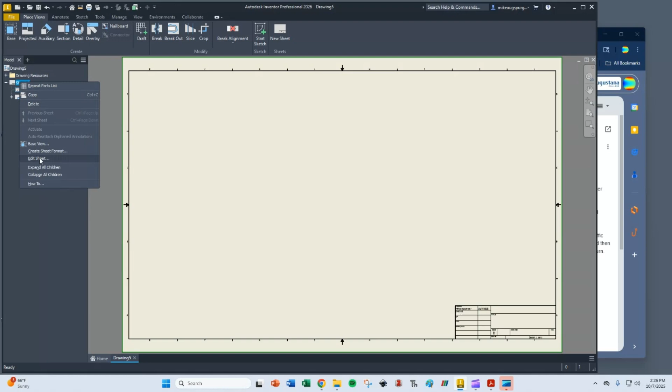Go to New, choose ANSI drawing, and do some of the basic stuff here. I don't want this giant sheet, even though an assembly might require a larger sheet, but I'm going to stick with the B size. And I'm going to change my properties. So I have a title, pulley assembly, and I'm going to fix my name and apply, and that looks good.

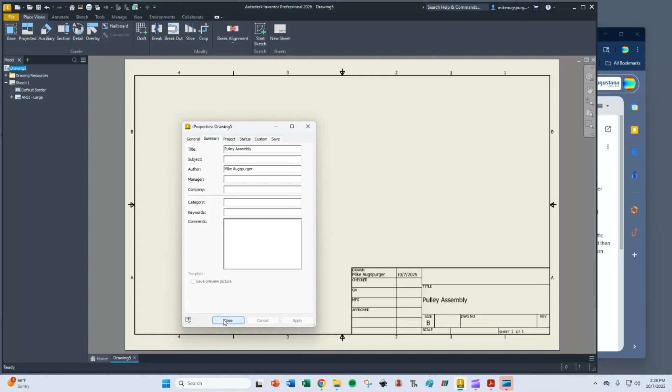We're going to go through the same process to start that we did before. We want a base, and so we want the assembly to be our base, so pulley assembly.

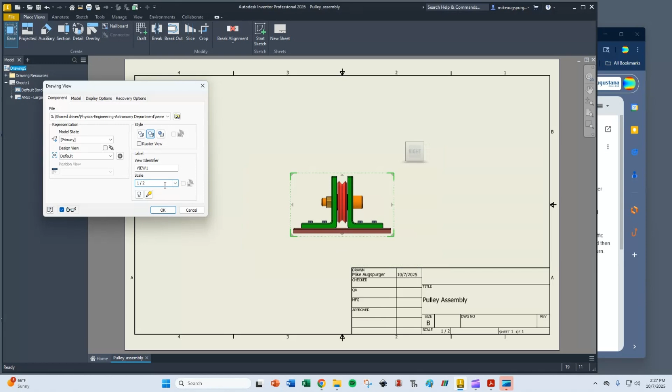You can see I've got to choose a view for my base. I'm going to go with that view, I think that gives me the best picture of what this is. And I have to choose a scale. The 1:1 seems too big, but the 1:2, or half, seems too small. I'm going to go with 1 to 1.5, just to give me a flexible sized view.

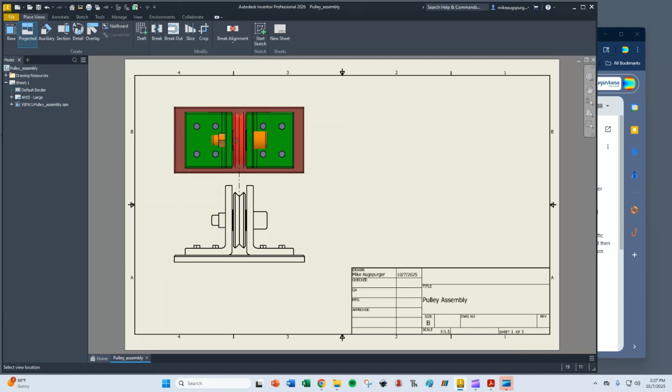And then I'm going to project that view. I really only need one projected view, I think. And I need that view, and so I'm going to create there. And that's a starting point anyway.

Now I want to show you some tricks. The thing about an assembly drawing is we know the dimensions already, so we don't really need the dimensions. What we want to do is show how the part works. And so sometimes there are ways you want to show that give you some details that these don't.

So one of them is called a section view. So we're going to make a section view here. I'm going to go to the section, and you see how the little yellow dot comes up? It's suggesting different sectionings, and I can do any, but I want a section right through the middle. I want to show that key apparatus with the pulley. So I'm going to go right through the middle, and then right click and click continue.

And you can see it draws that picture halfway, as if it were cut in half. I could put it up here, but that looks kind of ridiculous. So I'm going to go with this view and move it later.

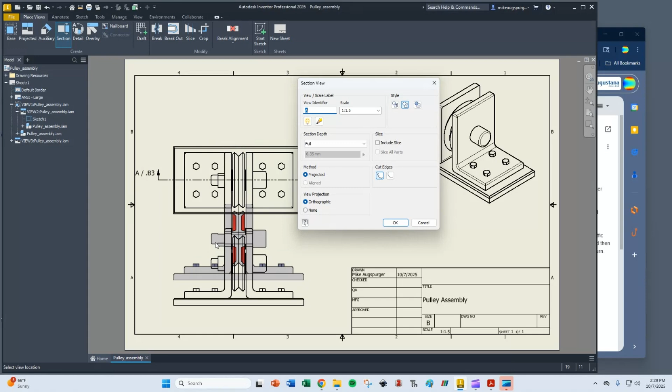So I'm going to click that view, and I'm going to escape out of this so I can move some stuff around, and see if I can grab this and move it up there. And this guy here is telling where to look for that section view.

And there's a lot of stuff. The view sheet and view sheet index, those are things I don't really need because my sheet is pretty small. So the only thing I need is a view identifier. I'm going to get rid of some of that complicated stuff. And you can see then this is section AA, so it goes from point A to point A.

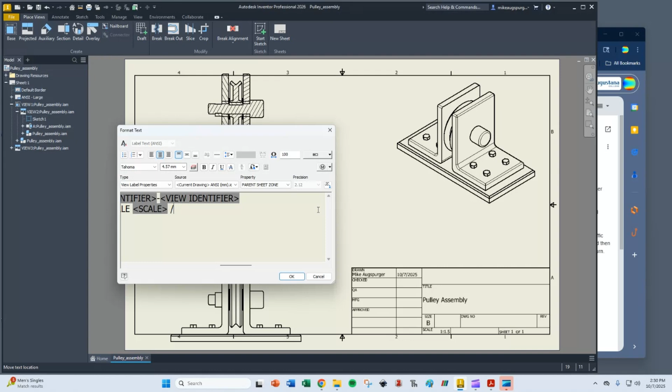Similarly, I don't need the parent zone. So those zones are parts of the sheet. You can see when you look at a sheet, it's got 4, 3, 2, 1, B, and A. So this would be B4 and B3. Sometimes it's useful if you've got a really big sheet to be able to point out different parts of it, but I think we're okay without that in this case.

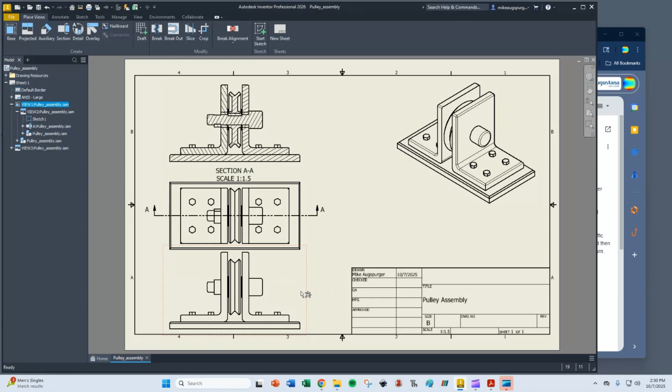And because the other ones are, if I look in here, you'll see this box is checked. That says it's going to follow the style from the base. That includes the scale—oh, I'm sorry, this is the one that followed the scale from the base. And so that's going to follow that.

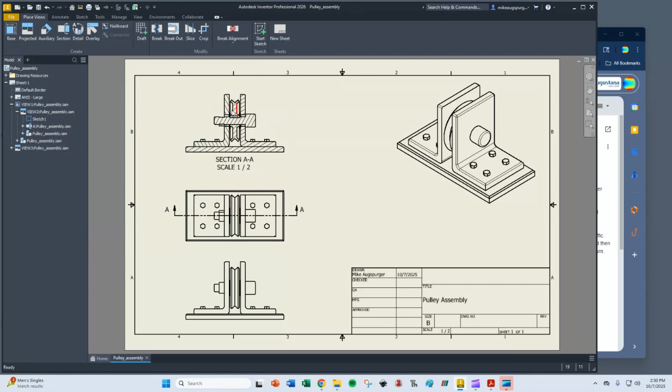Actually, one of the things I want to do is I want this guy to be in a little more color. So I'm going to go in here and go into the edit view here, and I'm going to click shaded there so we get a shaded picture of that.

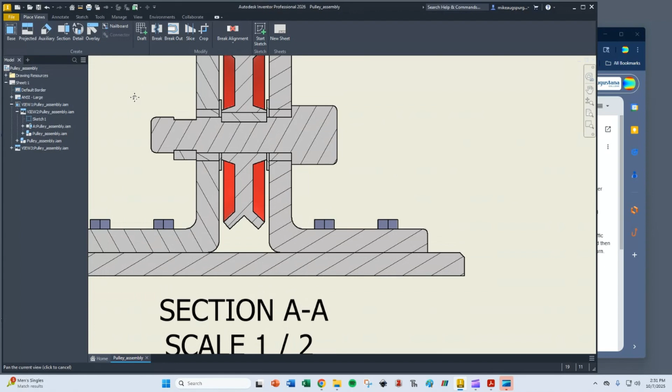And I want to also go in, there's a lot of detail here that I want to show. So I've got some parts here, the collar, the bushings, the key, and the washers that I want to point out. So the first thing I'm going to do is change the hatching, because they're small parts, so that hatching doesn't really work since it's very far apart. So I'm going to change the scale of the hatching.

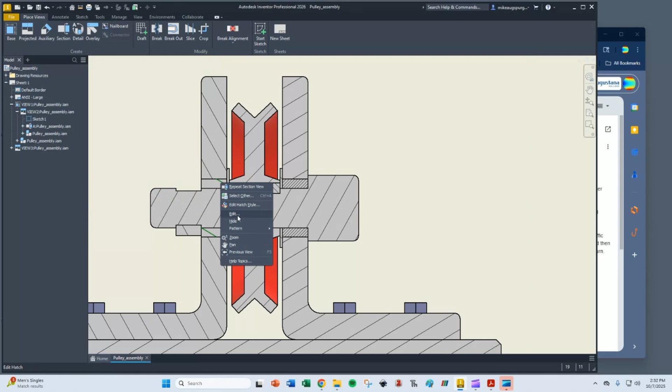So we're going to go to 0.25 for the scale of the hatching, so there my key is a little more visible. With this one, I'm going to go even smaller, 0.125, and you can see that's at an angle of 45. I'm going to make the other bushing match that, so I'm going to change this angle to 45 and the scale to 125. And so now you see that my hatching matches there and there.

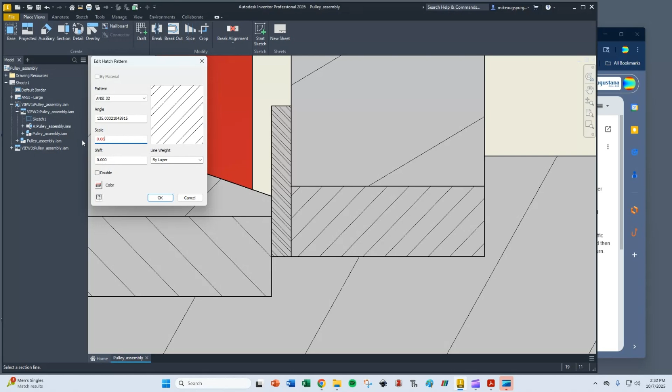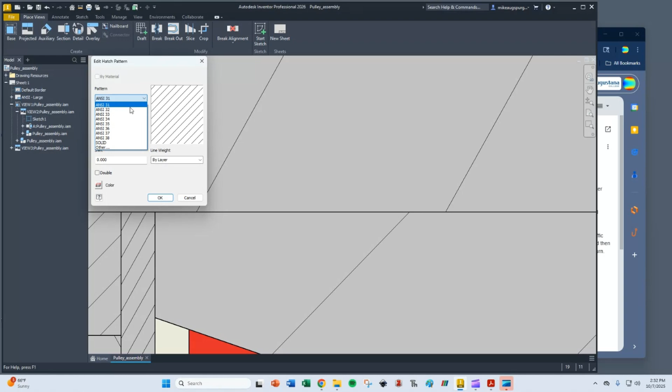I'm going to do the same thing. You can choose different styles too, like that style. I'm going to go really small here because it's such a small part that it's hard to see the hatching, so I'll do that with both washers. If I edit hatch style, that's actually going to edit all of the hatches on the whole part. I don't really want that. What did I change this to? ANSI 32. So there we go.

Now you can see, I can see my parts a little bit better. But maybe that's still not good enough to really show the detail. So what I want to do is have a detail view.

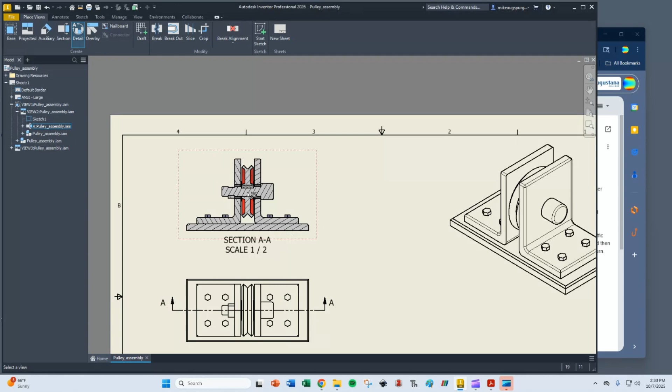I'm going to go to a detail view, and I want this center part. So I'm going to click with left, and you see I click again with the left and I get that sort of expanding view. I want to capture some of that there, and that enlarges that for me. Again, I don't need that sheet zone in there, so I'm going to take that out. And then that just tells me it's detail B. Get rid of my parent zone here.

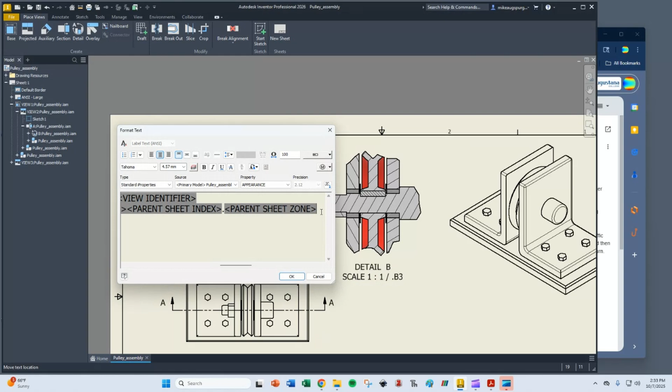And so this tells me to look over here for the detail. Now I want to tell people what those different parts are, so there are a couple of things I can do to do that. One, I'm going to add a parts list.

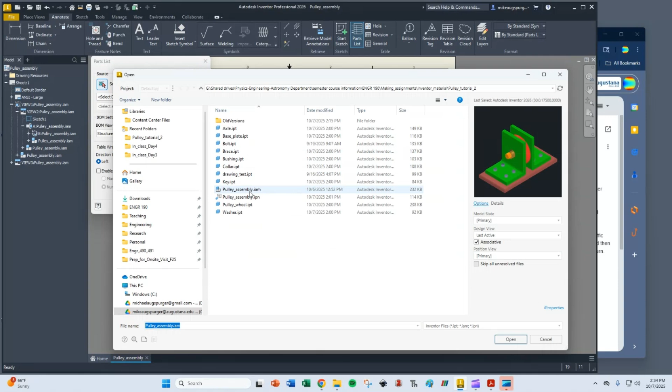So I'm going to go to annotate, and I'm going to add a parts list, and I'm going to select this document again, the assembly. Standard, everything looks okay there. A BOM is a bill of materials, I'm just going to click yes there. I'm just going to grab that and put it there. That's a little big for me, so I'm going to shrink it down some. But I get my parts list.

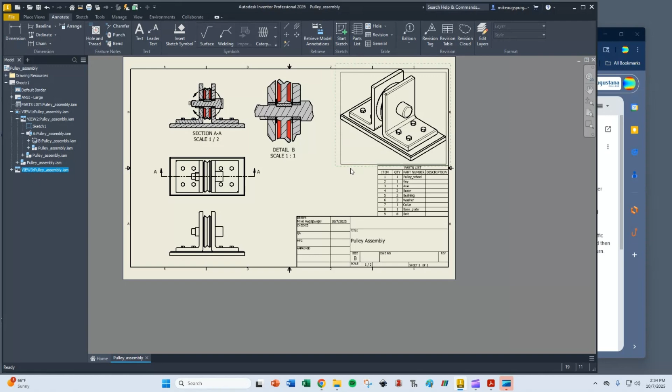Getting a little tight in here. Now I'm going to annotate this, so I'm going to have a text leader, and I'm going to point that. I'll left click it. And what was I pointing at? The bushing, so I'm going to put bushing there. And then I want to point to the other bushing as well, so I'm going to escape out, and I'm going to right-click that line and choose Add a Vertex. What that allows me to do is add a second leader to that one label.

Okay, so now I want this guy, that's my key. And I want my washers. So left click, washer, and then I'm going to escape out, add a leader, and connect it there. And so there I got my washer and my bushing, and let's add my collar too.

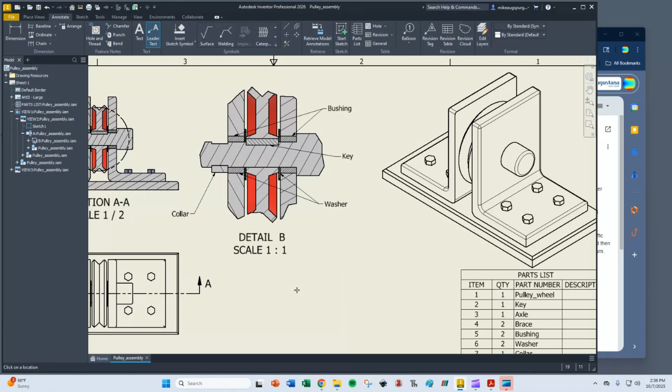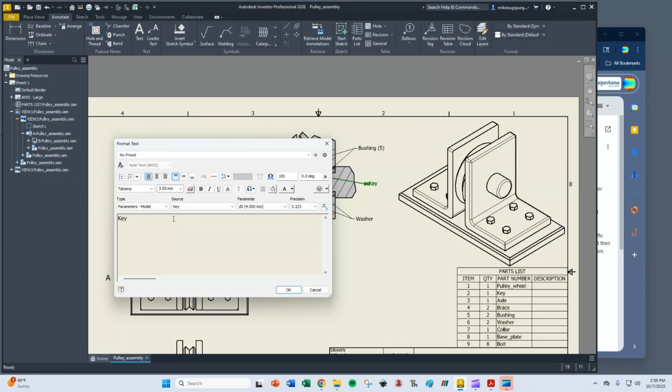So people can get a better understanding of what that is a picture of. Now I might also add the numbers for the item numbers here. So if I wanted to, I could go back and double click this and say bushing, just put a 5 in there. And my key is part 2, and so forth, like that.

Okay, so did a little annotation there. That looks kind of nice. There's one more way that we want to show this view. I'm going to save this while I'm thinking. Pulley assembly. I'm going to call this pulley assembly 1.

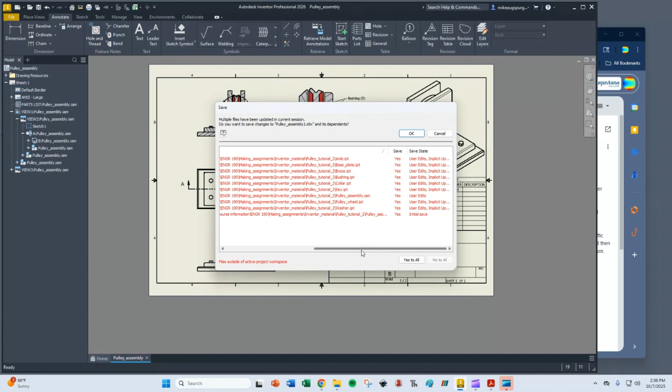And save that. I want to put it what's called an exploded view in here. That is a picture of the thing as it would be manufactured. So in order to do that, I actually have to open a whole new file. I'm going to new, and I'm going down to presentation. So I want a millimeter presentation. And I click create, and I have to choose that assembly again.

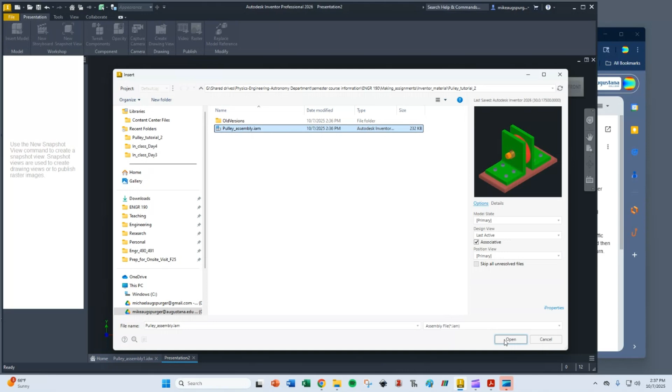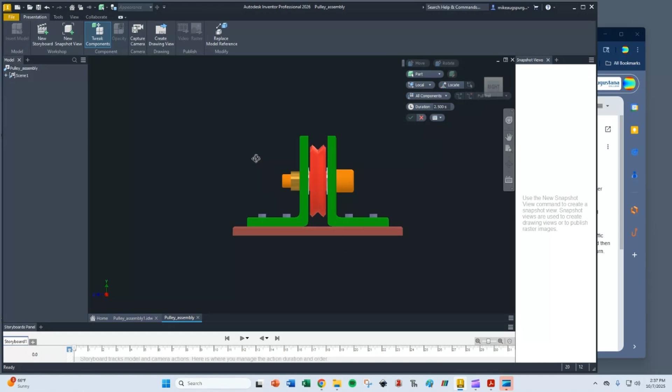And what I'm going to do is I'm going to take this apart so that I can take a picture of it. I'm going to start with it kind of like this. We're going to use tweak components, which allows us to move each of these components. I'm going to move these out in a way that makes it look like we're sort of assembling this as we go. So I'm going to click that once. Now I don't want to click anything again until I click this arrow. That tells me that I want to follow in a coordinate direction, and that makes this a lot easier. So I go there and click return. And then I want this collar.

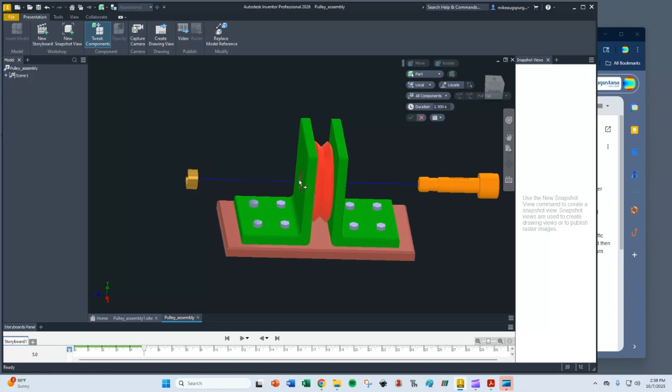And I want to tweak that, and I want to pull that way out here. Click return. If you notice clicking return does nothing, put your cursor back in this box here that tells you how far you can move a piece.

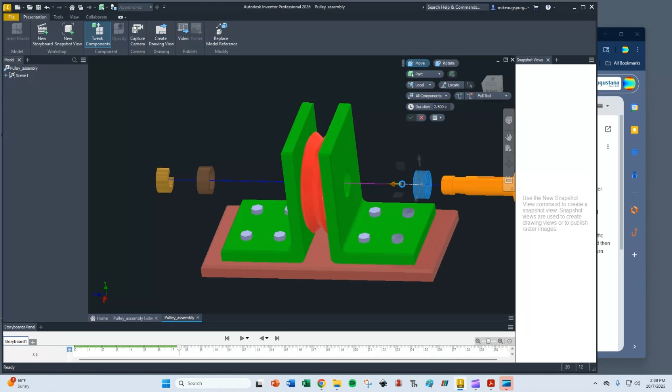So we're going to take that bushing there, and then we're going to tweak this. Oops, I messed up, so I'm going to escape out. I'm going to tweak again. It's very easy to grab the wrong thing here.

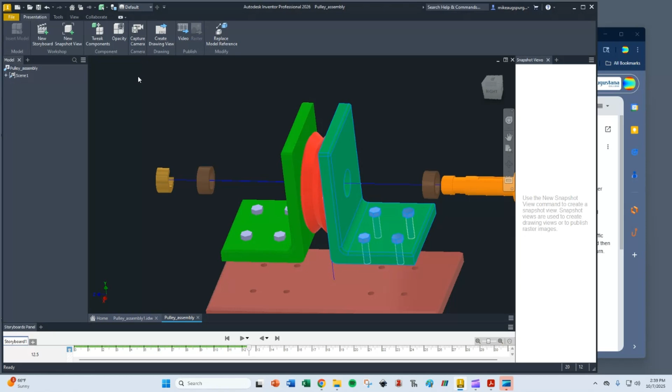Now what I want to do is move this guy down, the base plate, and move this whole brace to the right. So I want to left click, holding down shift as I do this. You see how it's lighting up all of those different things. Then I'm going to click tweak, then move all of those together. If you notice they're not moving all together, just click escape and try it again. And then put my cursor in that box and click return. Remove my washer.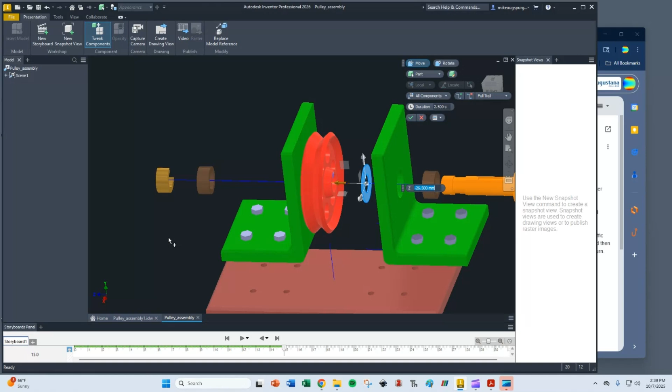I'm going to keep my pulley in the same place, and you'll see why in just a second. So I'm going to grab this side, holding down shift so I can grab multiple parts, and then grabbing the whole thing like so. Clicking return.

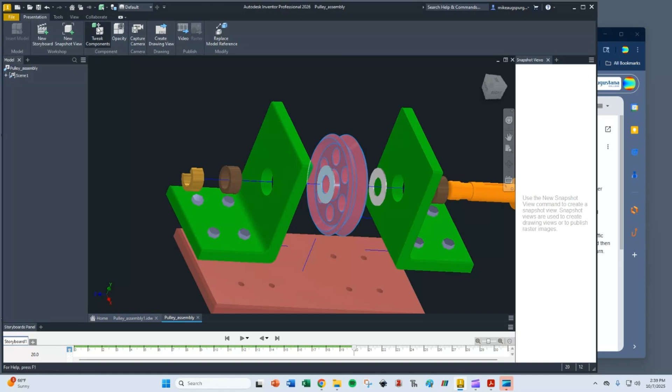Tweak. Oops, I tweaked the wrong thing, so I'm going to escape out. Come on, why is it not letting me grab the washer? That's the one I want. I'm going to move that a little bit. Now, why was I not moving? Because I wanted that pulley to be in the middle, and I want to move it up.

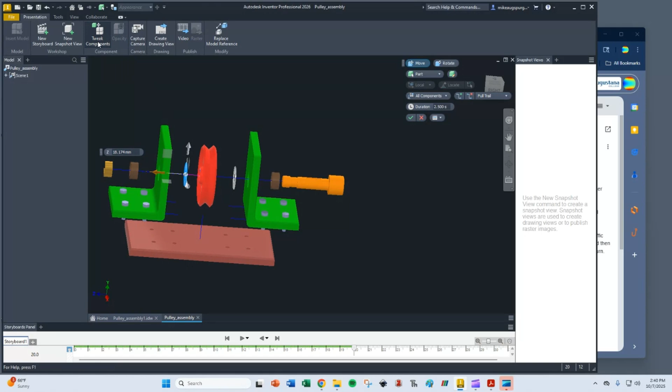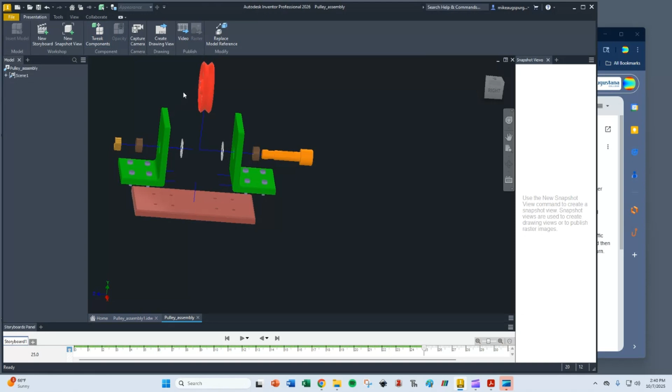So I'm going to tweak components, and I want to grab not only that, but also the key. I'm going to shift and grab that key. Now I've got both of those, and I'm going to pull that above here. The reason I'm doing that is I want to show that the key is inside that slot there. So now I'm just going to move the key itself off to the side, like that.

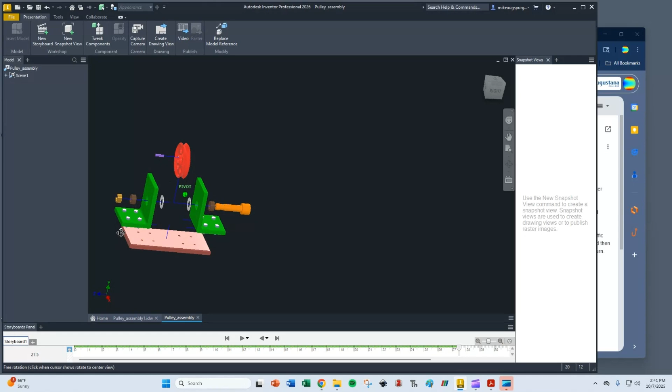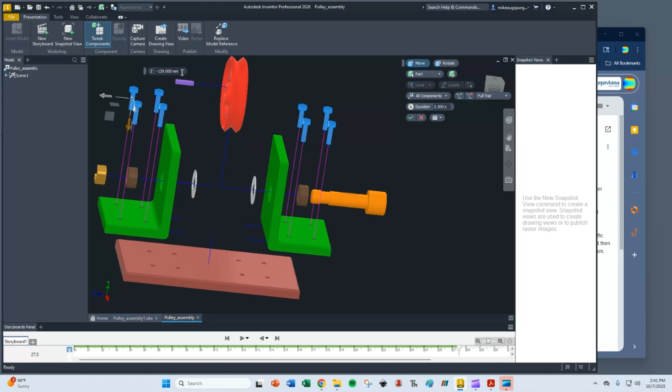And the last thing I'm going to do, I'm going to grab all of these bolts and move them up. So while holding shift, grabbing all 4 of them. And then I'm looking for... don't see the arrow, so I wasn't on tweak. So I grab that, like so, and click return. And that's my basic setup.

I think that looks all right. Pretty symmetrical, pretty easy to understand what's going on there. And then to use that in a drawing, I need to take a snapshot. So I go up here to New Snapshot View, and I click Snapshot View.

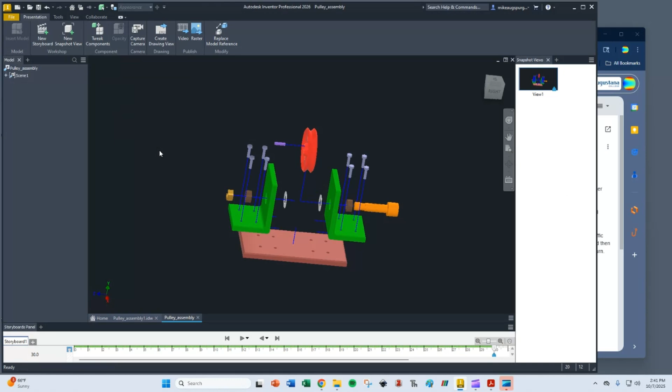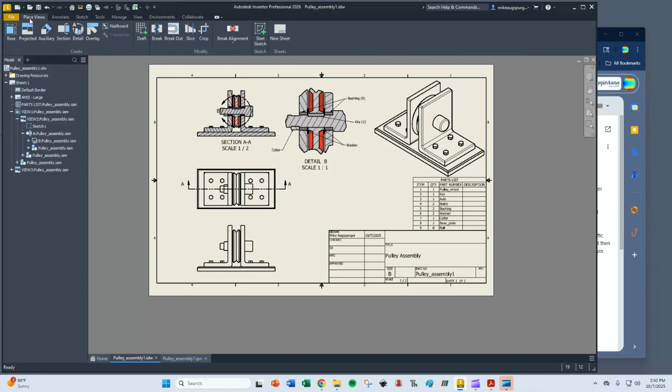So that I've got a snapshot view. Now I'm going to save this whole thing as a presentation. So I'm going to call that one, and go there. Now I want to go back here, and I want to place a view. I'm going to click Base View, and I think it'll, yeah, so it gives me, see that pulley assembly one.ipn. That IPN is a presentation, so that's what I want.

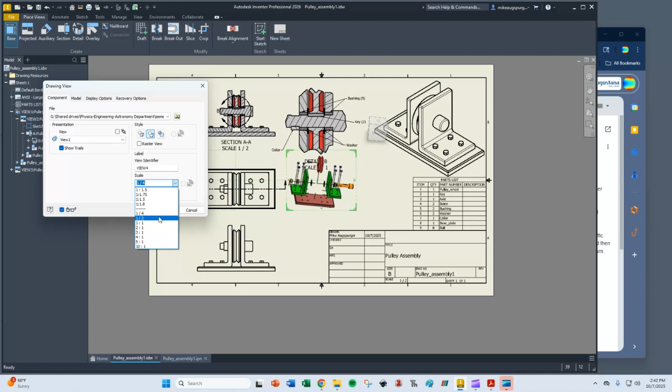And so you can see it's got that right there. That looks like, you know, let's see what half looks like here. Half might be too big. I think it's probably too big. Let's see if we can make some room for it. We could make our sheet bigger too.

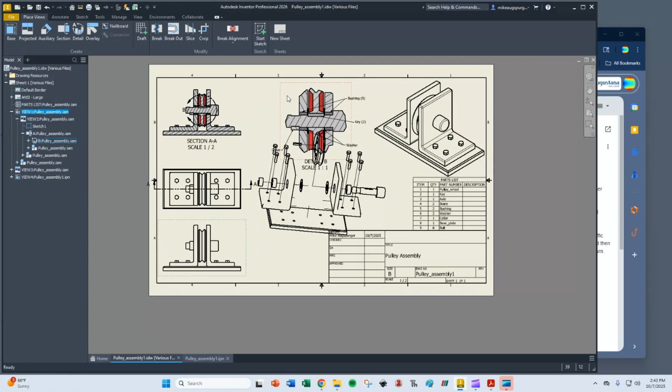Notice this doesn't let me try to move left. I've got to move my base view to the left, and everything else comes with it. So what if I move my detail view down there, and I move this guy up there? That's maybe a little busy, but then maybe we change this to make it a smaller scale. Let's just go half scale on that guy.

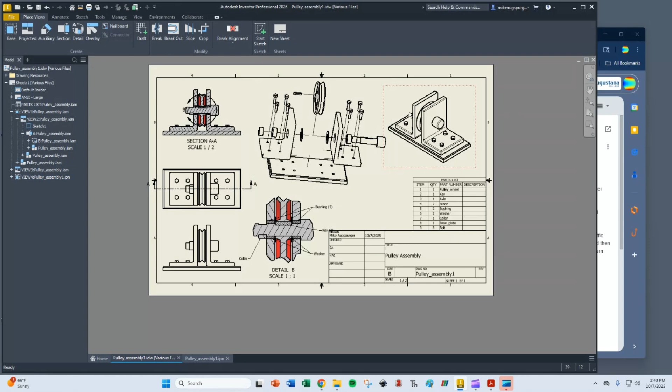And it kind of fits together. That's not the prettiest. I'd mess around with that some more because I'm not very satisfied with how that looks in the layout, but it's a pretty good start. And so you can see section views, exploded views, and detail views all give us a way of understanding how we're putting a part together. Oh, that bugs me too much. That A is off the drawing.

I'm gonna let you... all right, stop fiddling. Let's move some of these. So, oh my God, what a mess. There we go. Okay, so you can fiddle with yours to make it look nice. This is a little messy, but it's solid, and it does show you what you need to see. All right, that's how you do a drawing for an assembly.